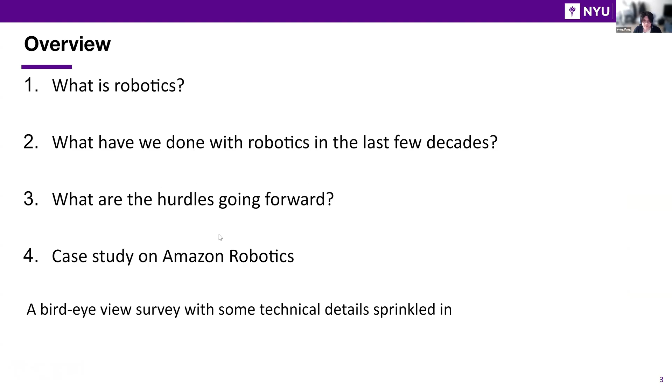The overview of today's talk is going to be these four points: basically what is robotics and what have we done with robotics in the last few decades, what are some of the hurdles going forward, and a simple case study on Amazon Robotics.

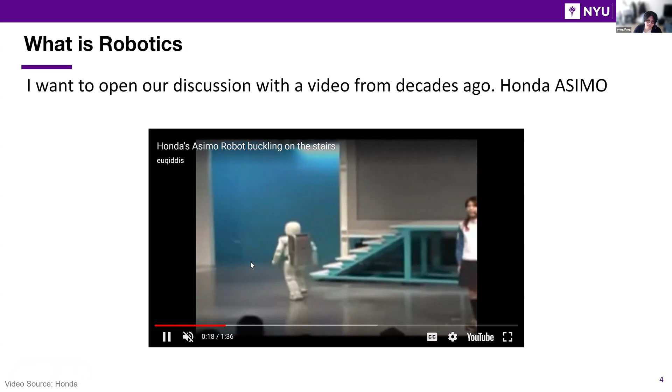I want to open our discussion with a video from decades ago. This is Honda's humanoid robot called Asimo. As we can see in this video, there is a robot shorter like a little human, walking around and carrying a backpack, walking very slowly, trying to do a presentation where the idea is to let the robot walk on the stairs. And while the title already kind of spoiled it, later on we'll find that this robot failed to do so - it basically falls down the stairs.

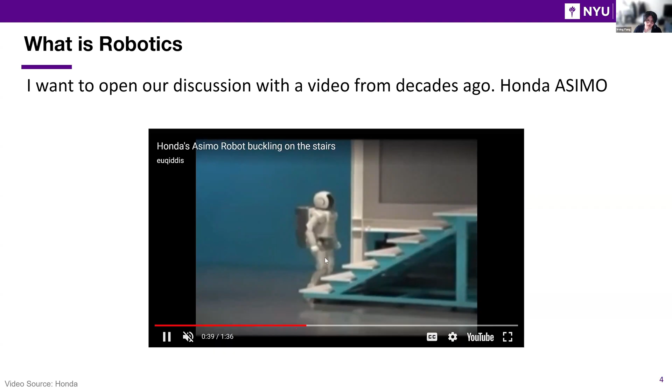For anyone very interested in robots, maybe as a kid, the Honda Asimo is a very famous, world-famous robot that made it into the public eye.

Traditionally, when we talk about robots, we also talk about these types of machine humans that have a little sci-fi element in them. But I'm going to show you that there are actually a lot more types of robots, or things people call robots.

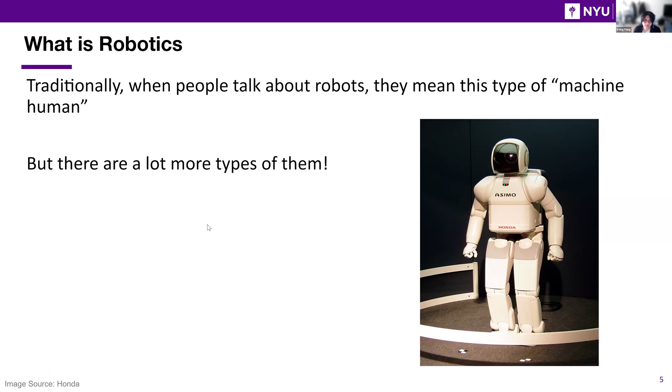In this video, I can briefly show you a VW robot factory in Hungary assembling an Audi car. As we can see, this robot can carry this very heavy metal component with relative ease and can piece things together with very high precision.

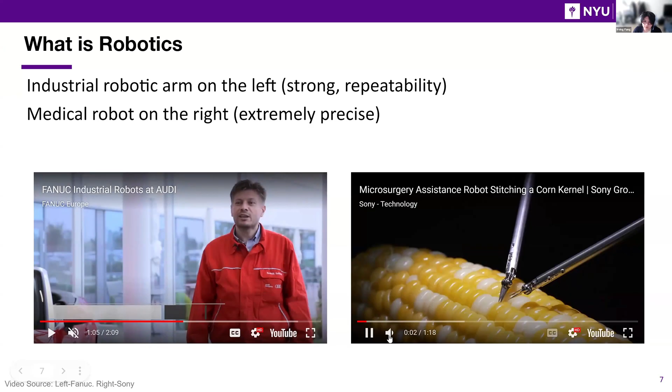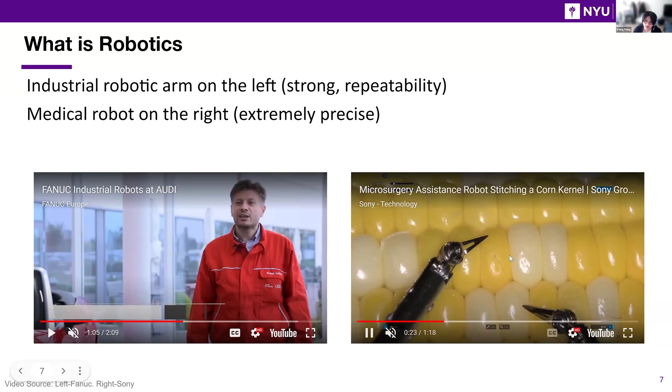This is doing some tracing of a certain line with very high precision. On the right, we have this medical robot from Sony - yes, the company that makes the PlayStation. They're showcasing a robot doing a mock surgery on a corn kernel, trying to mimic stitching a wound on the human body. As we can see, it performs a very precise manipulation on this corn.

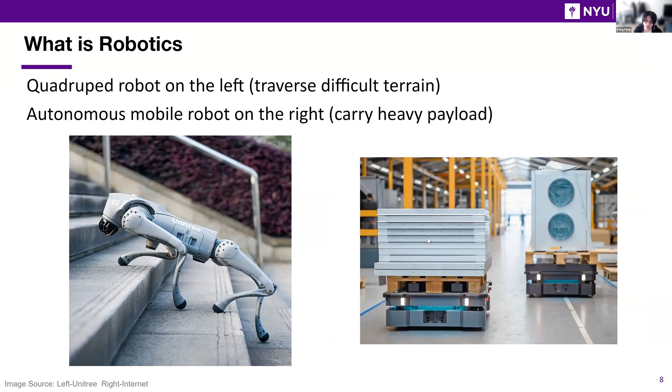And these are just two types of robot. In the wild, we also have these robot dogs that have 4 legs — that's where they get their name from. And we have these autonomous mobile robots that we often see in factories or warehouses, where they can carry very heavy payload and walk around.

So one question arises: isn't the quadruped on the left also a sort of mobile robot? Why isn't it called an autonomous mobile robot? As we can see, these names and classifications are mostly marketing jargon and human construction. They are not the essence of the robot itself.

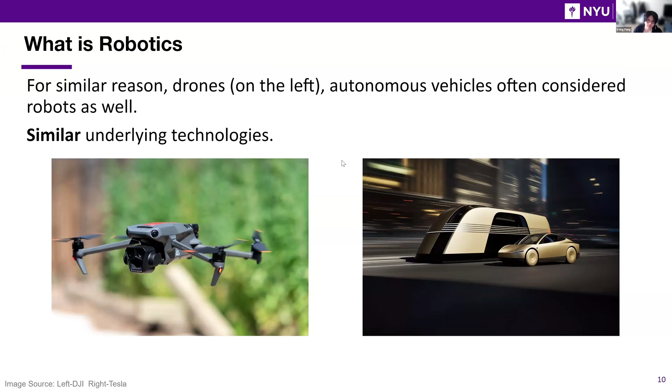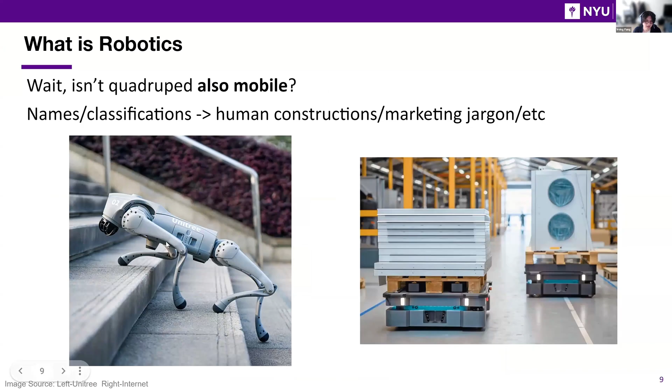But without a very ironclad, strict definition of what a robot is, we usually study things that are humanoid — shaped like a human — robot arms, quadrupeds, mobile robots with wheels, drones, and autonomous vehicles. So if you present research studying cashierless grocery stores, we usually wouldn't consider that a robotics study, even though some of the underlying technology is exactly the same.

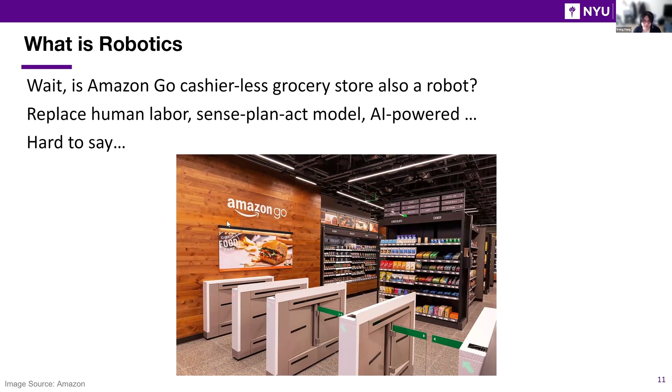So after talking about what is a robot, what makes something robotics, I want to talk about some recent progress in the academic community. Some of these aren't necessarily in order of significance, although I do pick things I think are some of the biggest breakthroughs in the community.

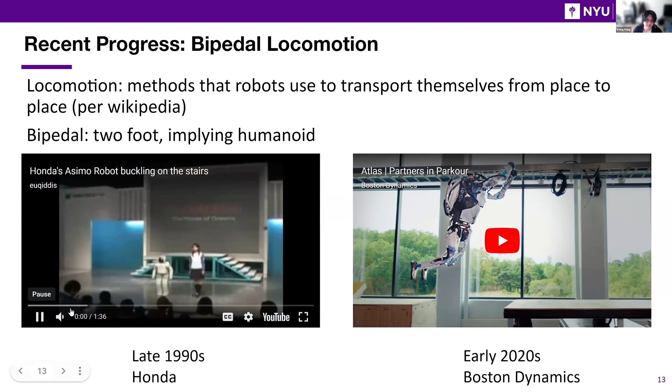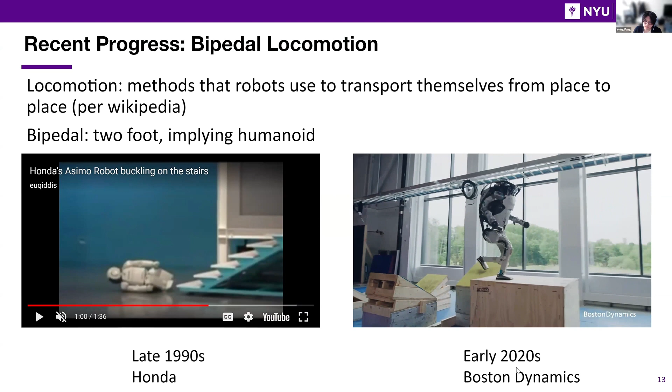This is the same video of the Honda Asimo that I showed, debuted in 1996 — almost 3 decades ago. This robot walks kind of awkwardly and later failed a very simple task of climbing stairs. But on the right, we have Atlas, a Boston Dynamics robot that can do very impressive tasks that even a healthy human sometimes struggles to do.

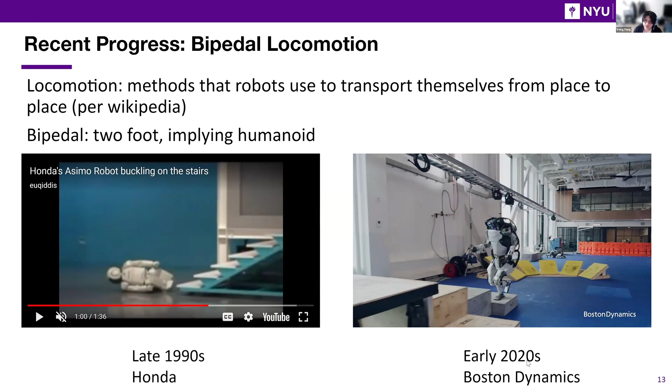So a natural question to pose is: what enabled this significant breakthrough in just a span of 3 decades?

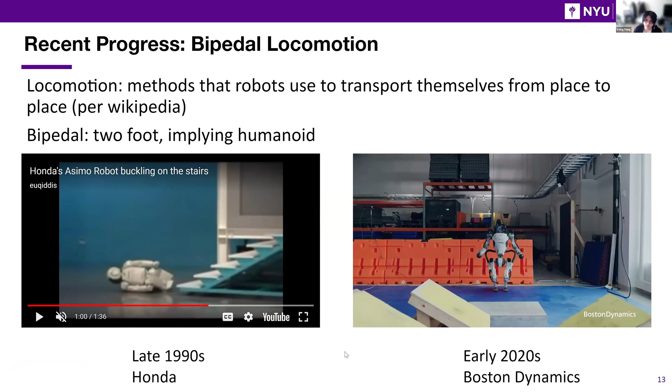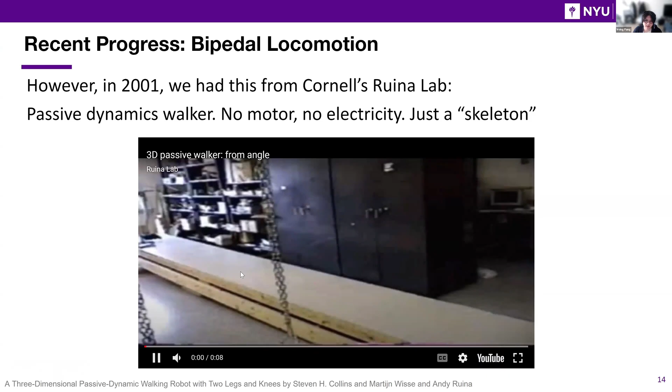To answer this question, let's first take a little time travel back to 2001, that's 2 decades ago. There is a very interesting research coming out of Cornell's Ruina lab, called the passive dynamic walker. Let's look at what it's actually doing. This is a robot walking down a ramp without a motor, without electricity — just a skeleton, metal shafts pieced together — and it can walk down the ramp with a very natural gait and human-like behavior.

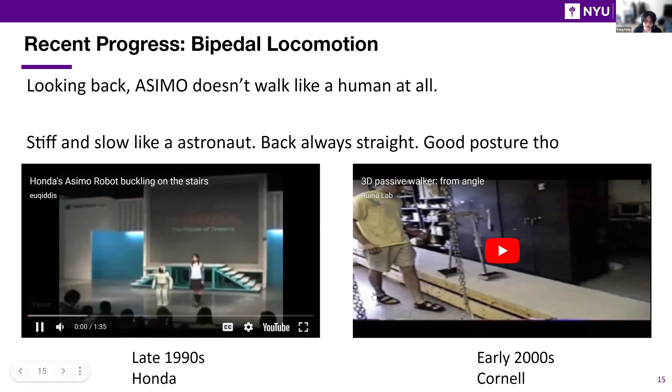So looking back now, comparing these two things, right?

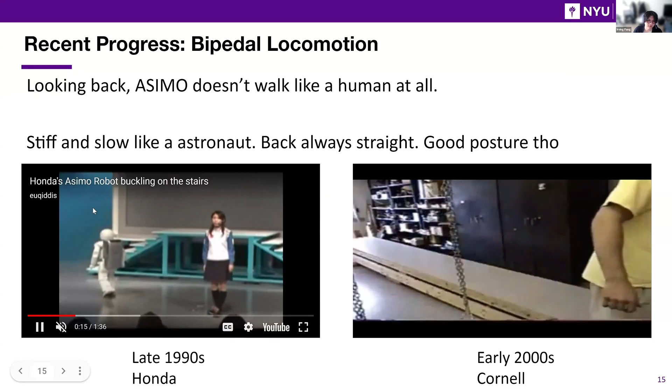Looking at these two, one of the major differences is that the Asimo robot walks in a very stiff and slow manner, like an astronaut. The back of the robot is always very straight and doesn't really look human at all—doesn't look like a human on Earth, I'd say. Whereas this robot uses a lot of motors, electricity and energy, with a battery pack on the back.

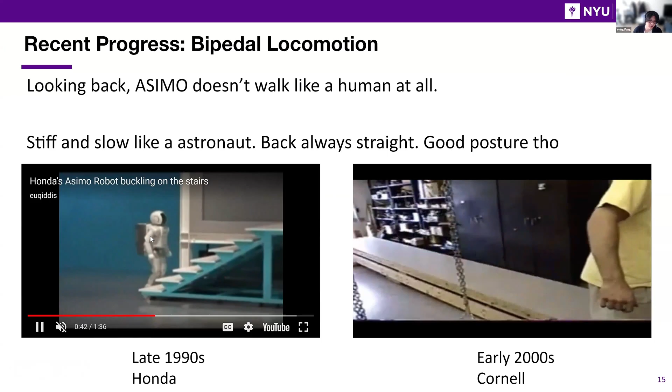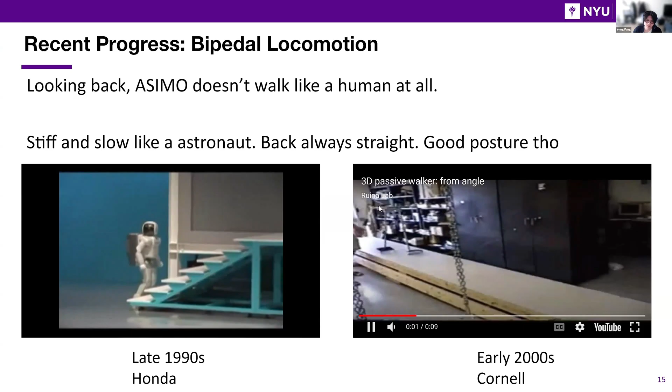So why is it that such a sophisticatedly engineered machine performs so much worse than this very simple shaft pieced together, with no electricity, no motors? The answer, without getting too technical, is...

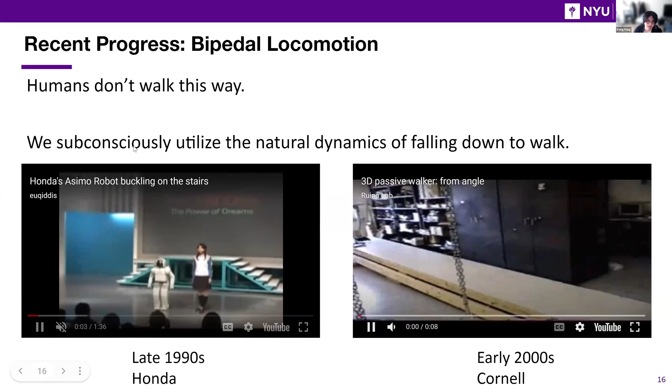We subconsciously utilize the natural dynamics of falling down to be able to do the walking behavior. The Asimo robots use a very conservative control strategy that lets the motor cancel out every possibility of falling down. So the robot walks very stiffly, because every motor is exerting very strong power against the natural dynamics of the system. The robot won't fall down, yes, but it also walks very conservatively.

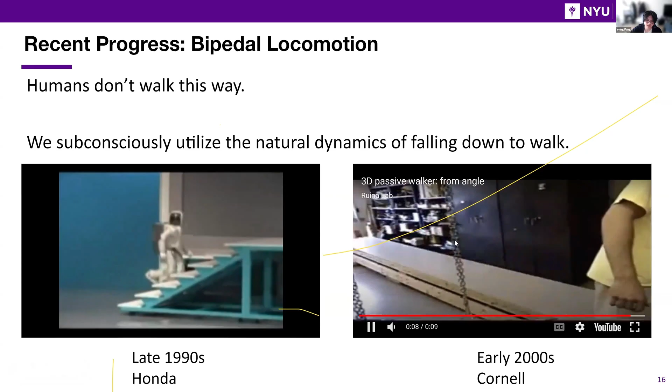Whereas on the right, the robot is walking by utilizing this falling down dynamics. There's a ramp—if you put a ball on this ramp, the ball will just roll down, rolling down.

By the way, what is this? What is this yellow line on the screen? And there's this yellow line on... sorry.

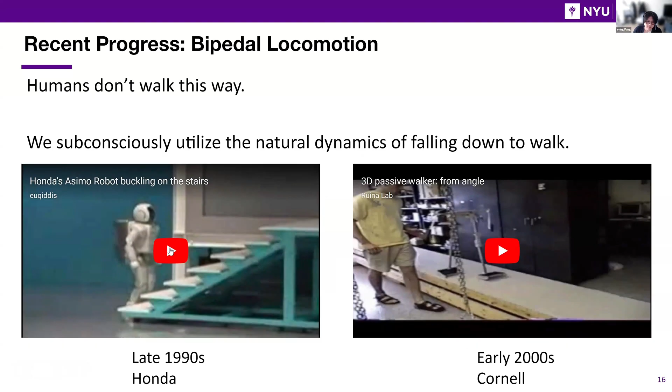This is utilizing this dynamics instead of actively trying to cancel out the falling down dynamics. And this is a very key insight that gives rise to the better bipedal locomotion we see today.

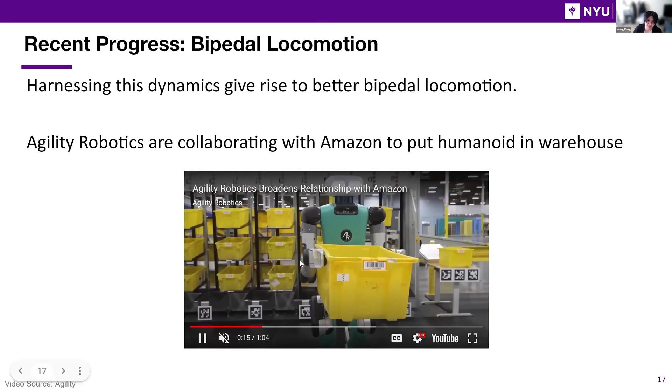This is another humanoid robotics company called Agility. They're collaborating with Amazon and can perform manipulation tasks like moving empty bins around. I brought up this company because it's founded by Professor Jonathan Hurst, a robotist with extensive experience using this kind of bipedal dynamics. Precisely because we now have a better understanding of this dynamics, of how to utilize this falling down tendency, we are creating these better humanoid robots.

In a sense, this is similar to how different birds and airplanes fly. A bird can use very little energy and stop on a tree with ease, but our human-made aircraft needs an immense amount of energy compared to its body weight to fly, and won't be able to do any tricky maneuver like stopping midair to land on a tree. But that's very easy for birds and any living creature to do, precisely because they subconsciously learn how to manipulate the natural dynamics of their body weight.

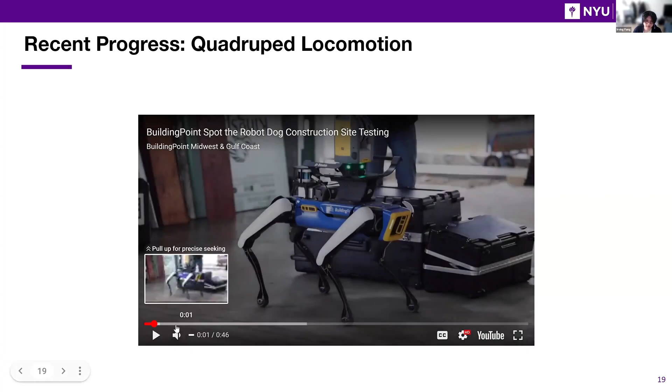Similarly, this gives rise to better quadruped locomotion as well. I'll omit some technical details here, but quadruped is obviously a lot easier than bipedal, two-foot locomotion. So this is trying to showcase some of the capability of evolving quadruped robots.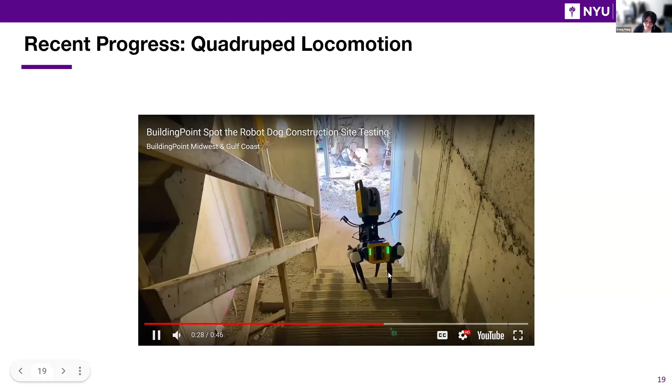One thing I want to highlight is this behavior of walking upstairs. This is one of the major reasons we want legged robots instead of wheels or other locomotion techniques. Legs do provide better traversability when it comes to difficult terrain, and quadrupeds are slightly easier to handle than bipedal.

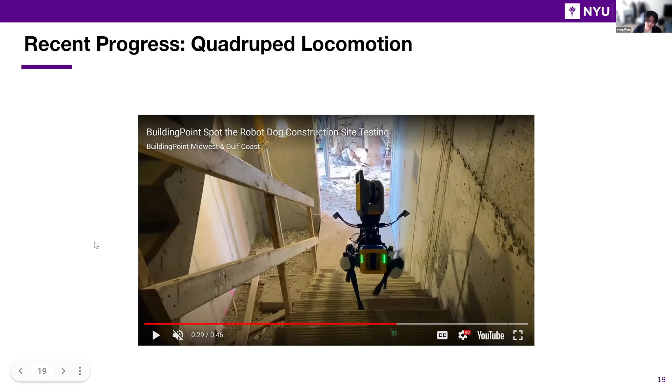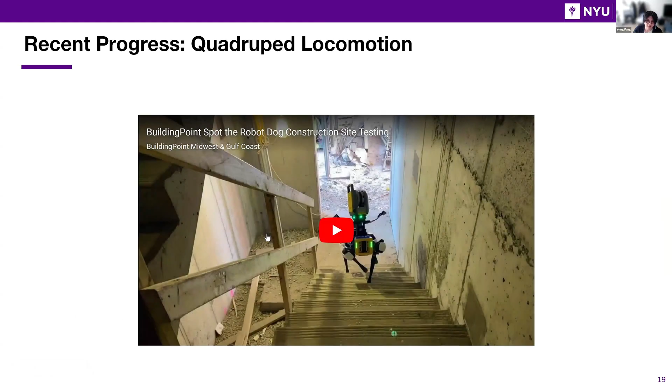But under the hood, the improvement we're seeing recently is also due to the reason I mentioned—that we now have a better understanding of this dynamic system, of this walking dynamics, which allowed us to create these improved robot systems. So another very recent progress we're seeing is that traditionally most robots work in a cage, or no-man condition.

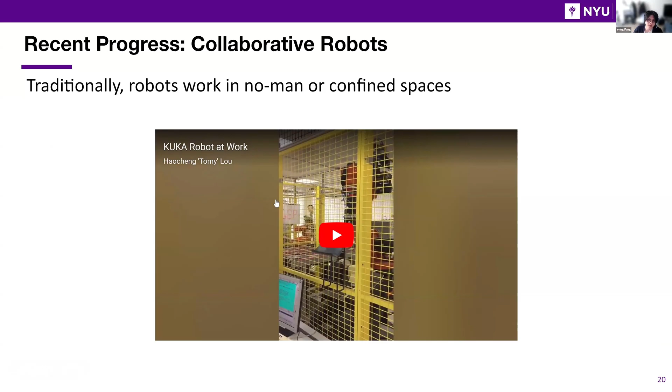For example, in this case, there's a yellow cage around this KUKA robot doing whatever task—I'm not exactly sure, seems like a demo.

The reason is because these robots have very limited perception capability around the environment. They do not know what's going on around them; they just do whatever they're programmed to do. When a collision happens, when a robot collides with a human, the robot will have very limited understanding of what it collided with, and it will basically keep going and crush the human's bones. A human is very fragile in the face of a robot, a working industrial robot.

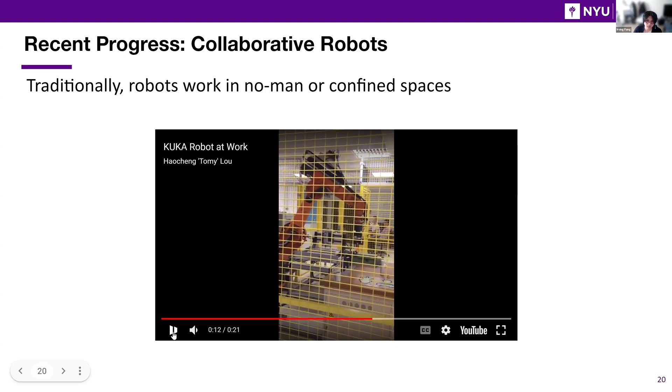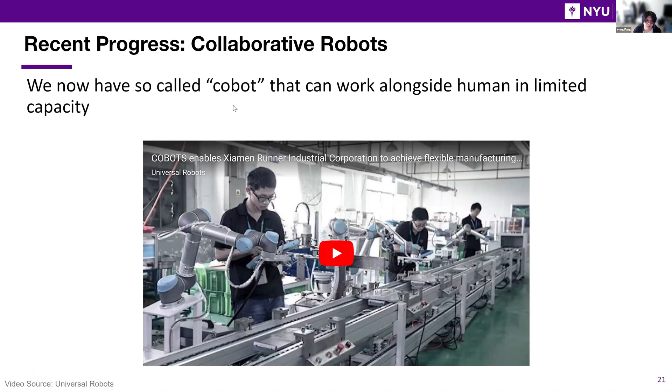But this is changing now because we have this so-called cobot, short for collaborative robots, and they can work alongside humans in limited capacity.

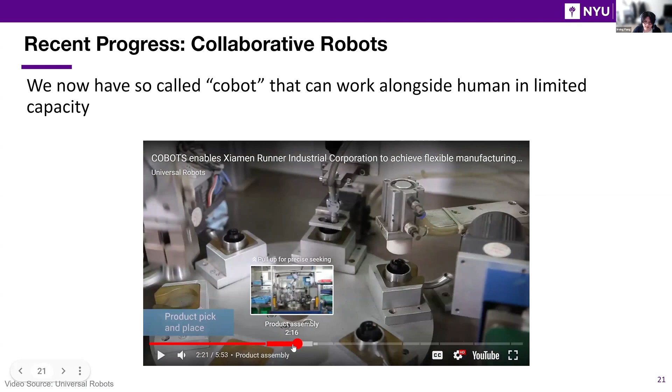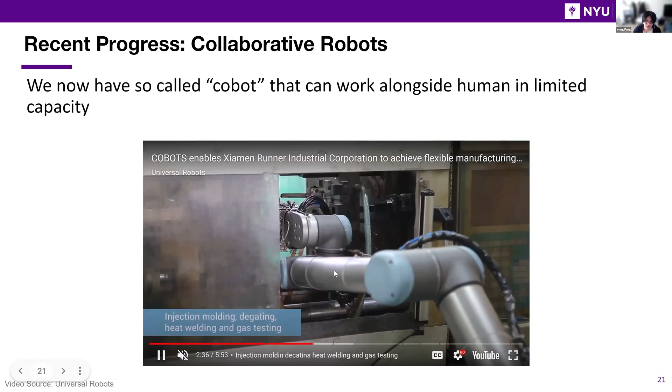This is a factory in China, Xiamen, where they're making, I believe, car components. As you can see, we can see humans walking with this robot in very close proximity. They are feeding parts to this little machine, and the robot can pick the stuff immediately.

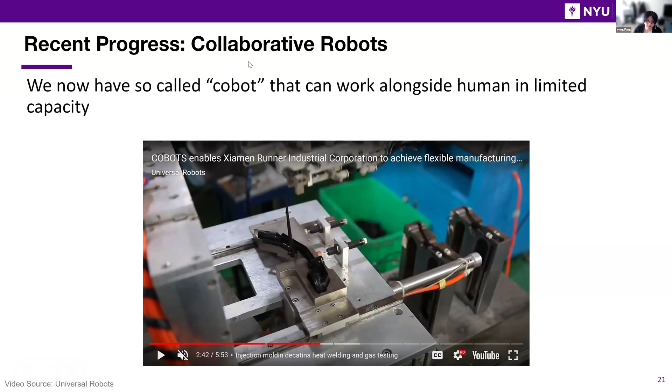Overall there's very little safety concern with this. Well, there are different regulation standards across the world, so in some places this kind of factory layout is not ideal, maybe will be illegal. But this also showcases that today there are industrial robots much safer to work with humans, unlike the one I showed previously, where it has to be put in a cage.

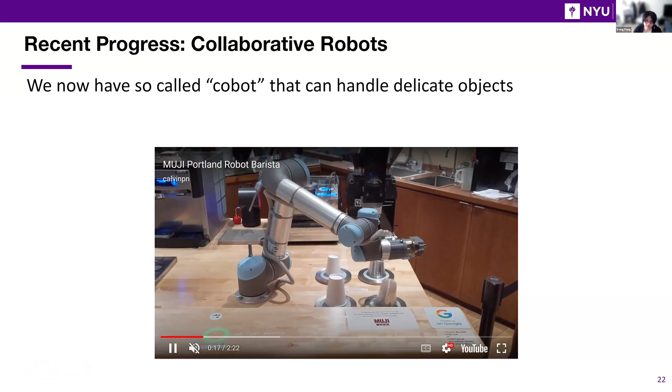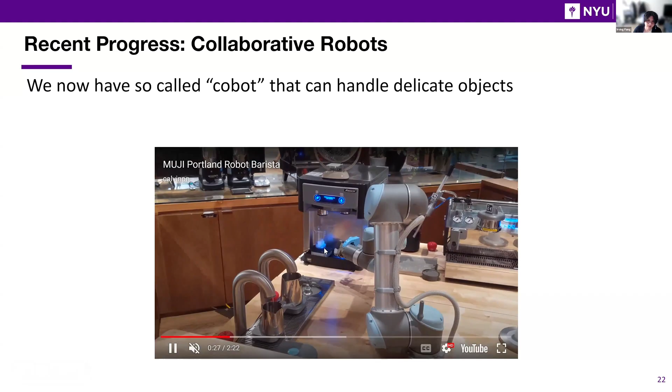This is a video I didn't take, but this is actually a robot in Muji in Portland, doing a bit of barista work, making coffee, and handling relatively fragile items such as a plastic cup. A lot of the stuff you need to eat needs to be safe and usually very soft. Now these cobots can also handle these very delicate objects.

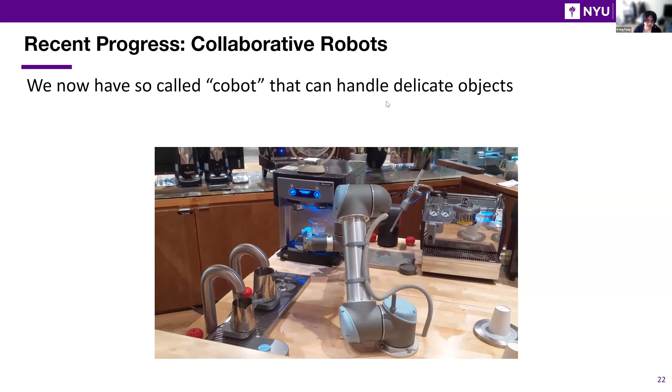So what enabled this transition? Why are we having these robots now, and why are industrial robots usually dangerous and only kept in confined environments? There are a lot of reasons for this.

One is sensing - the robot can now see better around the world. I'll talk about this later in more detail. But another thing is that now we have better control algorithms, or another way to put it, there are certain control algorithms that can make robots safe when there's contact. But back in the day, we didn't get much adoption, and we didn't really apply them to robots - we applied them in other engineering domains.

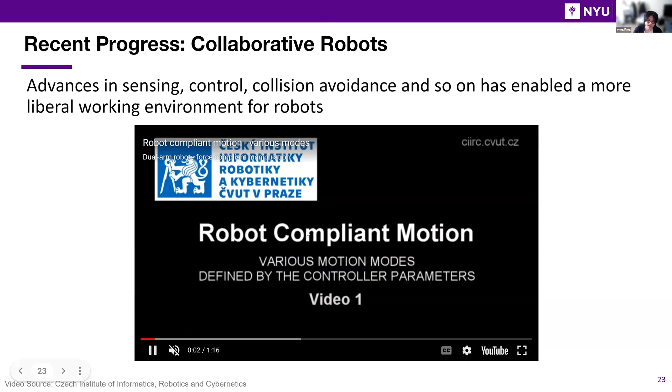This is an example of exercising compliant motion, meaning the human can sort of play with this robot and the robot will not be very stiff. It will act like a spring - if you push it hard enough, the spring will compress, and if you push with relatively little force, the robot will not move or react as hard.

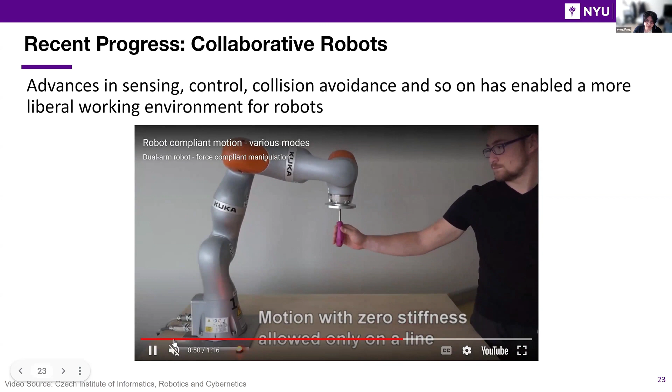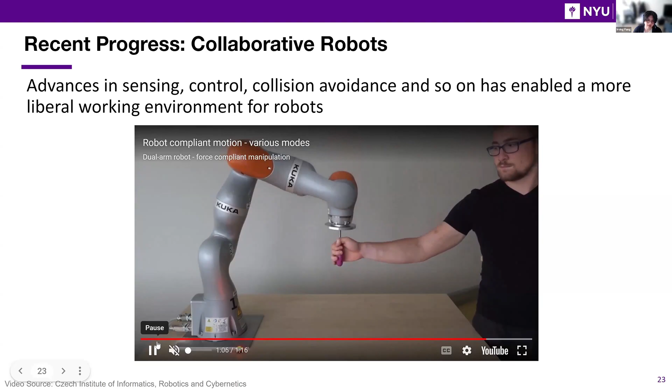This is enabled by additional sensors in the robot and a clever algorithm that enables you to do so. This makes the robot relatively safe. As you can imagine, if there is a collision between the robot and the worker, when the collision is hard, the robot will become soft, will act soft - the material won't change, but it will act more softly, resulting in a less dangerous collision.

Talking about sensing and perception brings us to another major advancement we've seen in the last few years. Like many autonomous systems, the robot generally follows a sense, plan, and act model.

This basically means the robot first senses, maybe by seeing with a camera, maybe by lidar or radar - whatever can sense the surrounding environment. Then the robot thinks for a little bit, a computer does a bit of thinking, and then lays out an action plan and does the stuff. Humans roughly follow this pipeline too - whenever we want to do something, we first look around, think about it a little, and then do our action.

However, humans can also think about things while we are actually doing the thing. For example, when I grab a water bottle or my iPhone, I don't first locate it and close my eyes to grab it, then open my eyes again when I finish. Whenever I grab it, my hand can feel this thing - my hand can feel that there's something in it and there's a certain shape to it. So I always have this sensation, always have this feeling.

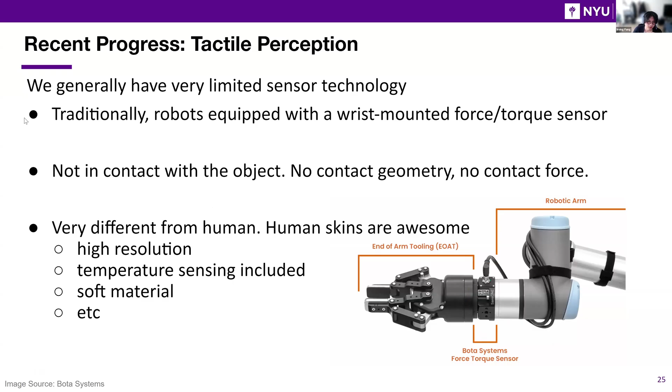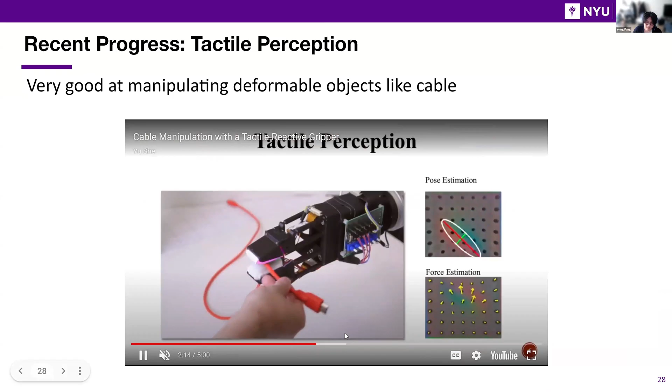Something tangential to this, though not entirely the same, is that I previously mentioned medical robots that can perform delicate operations human surgeons found difficult. One big caveat is that just before this year, before 2024, all those medical robots had no force feedback. This means that if the surgeon is manipulating these little knobs, little controllers, just like a PlayStation controller, the underlying principle is exactly the same. When you're manipulating this, maybe doing surgery on a human, and say the little knife hits some organ or bone, the human hand will feel nothing. You can only see on your monitor that the robot is colliding with something else, but the human doesn't actually feel it. There's no force feedback to this little controller, and that's been a problem for 20-something years.

The company Intuitive Surgical, maker of the Da Vinci robots, has been around more than 20 years, but their robot never had the capability of providing a little bit of haptic, a little bit of force feedback. That is changing this year. In 2024, they started to sell their Da Vinci 5 system, which finally comes with force feedback. This isn't exactly the same technology that enables what we saw when manipulating mushrooms, but they're very related.

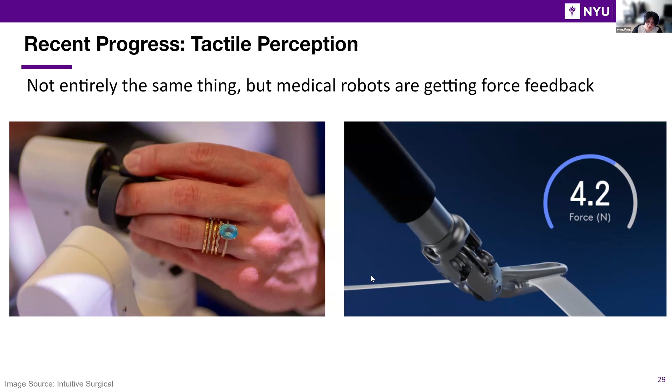So these four things that I briefly mentioned are some of the biggest progress we've seen, enabling robots to move around better through bipedal locomotion, enabling them to work alongside humans instead of replacing them, and enabling them to manipulate things we thought robots couldn't handle, like cables or delicate food. But at the same time, there are also a lot of hurdles going forward in the robotics domain.

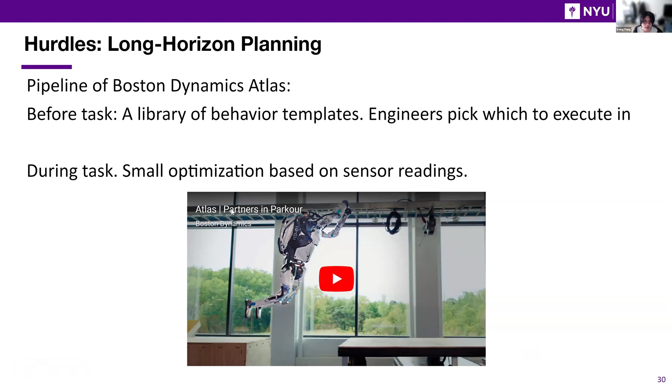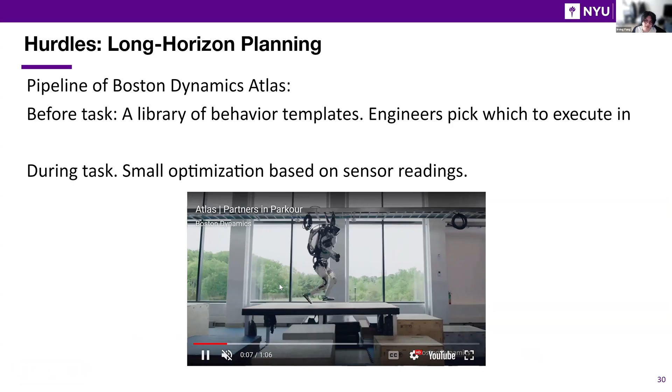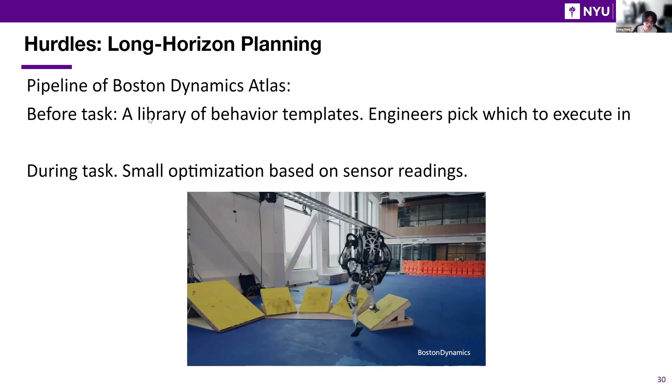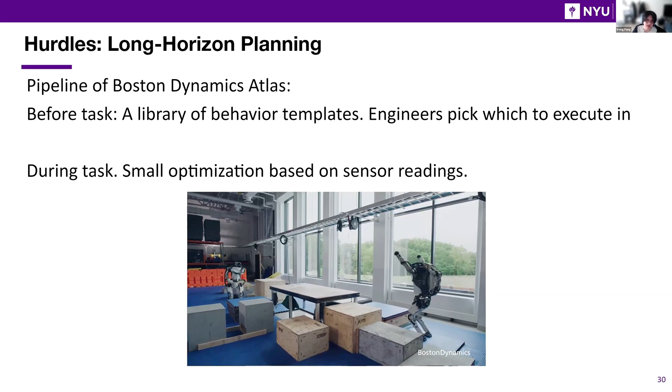One thing is this long horizon planning problem. Coming back to this very impressive Atlas doing some tricks - how do we actually achieve this pipeline? Boston Dynamics never explicitly published their technical stack, but most people in the community agree they follow a pipeline like this: first they have a library of whatever behaviors look very cool. When they want to do something like this, some engineers come together and chain them together.

When chained together, it's like a dance move that you memorize - when to execute what. While the robot is actually doing these things, there are sensors on the robot doing small optimizations based on sensor readings. But everything else, like how the sequence is designed, is done by engineers. So there's some human in the loop, and this actually poses a significant challenge.

For example, if we want a robot that can make coffee for us, at some point inevitably the robot will make mistakes, maybe spill the coffee or whatnot. So when that happens, what is the robot going to do? The robot needs the capability to reason about these long horizon tasks - even if it's the same pipeline of chaining behavior templates, how do we chain them together? This capability is very important.

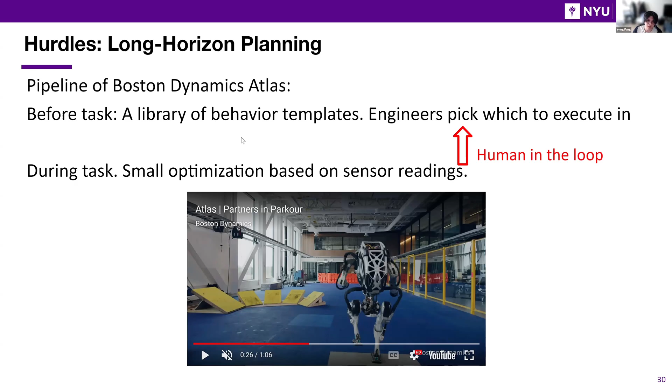This might turn out to be a very useful answer, maybe not the only one, to a long-standing problem that has troubled robotics in the entire world. There are a lot of variants, some people call it large vision language model, some call it large vision language action model. Things get more and more complicated in name, but the underlying idea is the same: we use GPT-like models to do the kind of thinking we believe only humans possess.

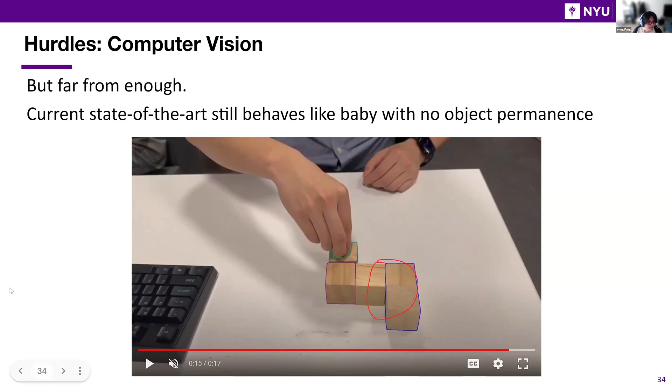There are some other examples similar to this. In this video there's even more stuff, but the idea is the same, different color for different cube. Here we already see that this cube that had a yellow contour, the model loses track of it. Another thing: at this moment, this one is a purple block. When it's moving, there's a brief moment where the model thinks this is actually a block with a green contour. So we see all these temporal issues, meaning the model has all kinds of difficulty when it comes to this tracking problem. This turns out to be a huge issue in robotics when robots are walking around in the real world.

Another major issue comes back to the humanoid we talked about in the very beginning. Even though we're all excited about robots that look like humans, do we believe that human is the ultimate form factor of living creatures? That humans are the perfect form of any living being? That seems pretty unlikely. For example, whenever we want a room that's not too hot, instead of having a robot wave a fan for you, ideally we'd want an air conditioner that looks nothing like a human but performs much better at the job, much more efficiently at making the room less hot. So this is another problem.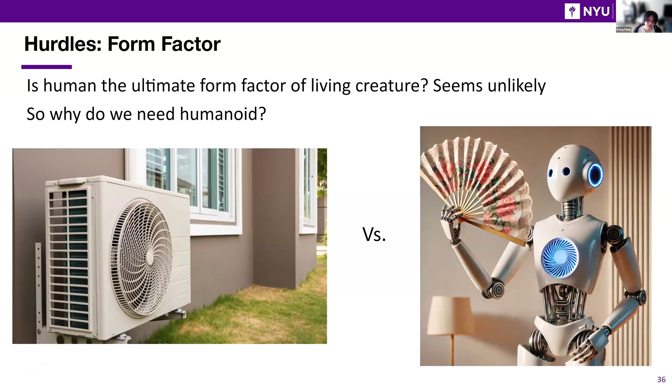Do we even need humanoid robots? When we spend so much money and R&D effort on it, do we need those humanoid features like an arm or leg? Are they even necessary? Do we even need robots in the first place?

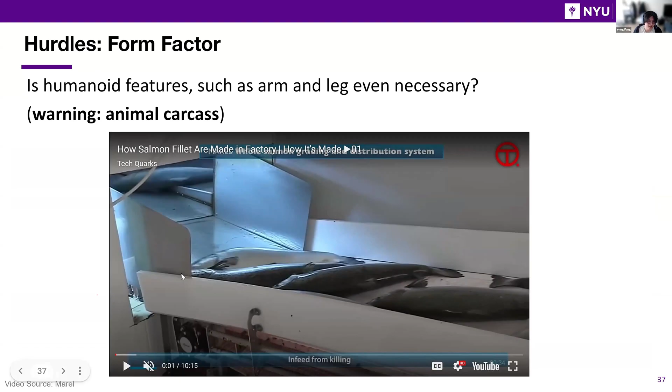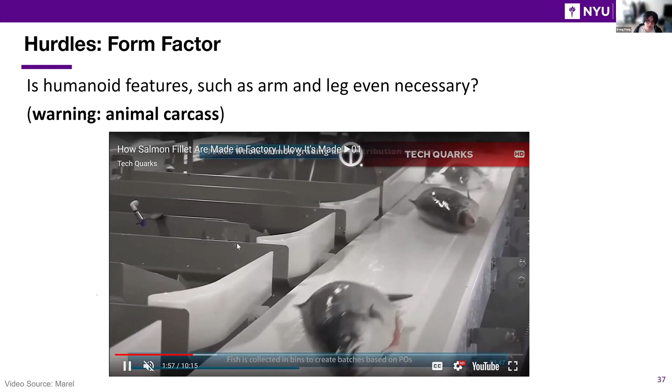This is a factory that handles salmon, and there are some animal dead bodies, so if you're not comfortable with these, please look away for a bit. When we see how this salmon's body gets handled, there's no human arms involved except for those workers. There are automatic mechanisms, machine designs that can efficiently put them away. So do we even need these human features like arms or legs to help us handle all these things?

I don't actually have an answer for this. There are a lot of debates within the community, whether it's industry or academia, that we're still learning what is the ultimate form factor for robots.

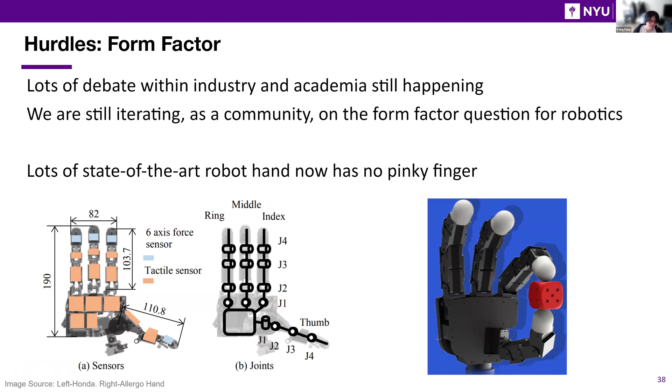One interesting thing I can introduce is that the state of art robot hand mostly has no pinky finger. They only have four fingers, and they're able to handle most of the robotics manipulation jobs. This shows that maybe humanoid features are not the most efficient, not the best thing to do, and there's a lot of room for improvement. We'll come back to this later.

But another major hurdle with robotics is that in general, automation is one of the most delicate problems in our society. For example, just a few weeks ago, there was a huge strike at a U.S. port that handles offloading containers from ships that the U.S. imports from other countries. You might not know this, but the U.S. has some of the least automated ports globally, and by some efficiency ranking that think tanks and researchers did, the US actually has the least efficient port in the entire world.

Not among developed countries, but on the entire planet Earth, because people have this strong opposition to automation. And I do think they have very good reason to think this way.

Another Nobel winner this year, Daron Acemoglu, examined data in his paper that shows automation is increasingly displacing jobs faster than creating new ones. Although the implementation effects of automation aren't exactly clear, for example, some economists believe automation enables companies to grow beyond their potential and in the long term create more jobs. So as for now, we don't really know.

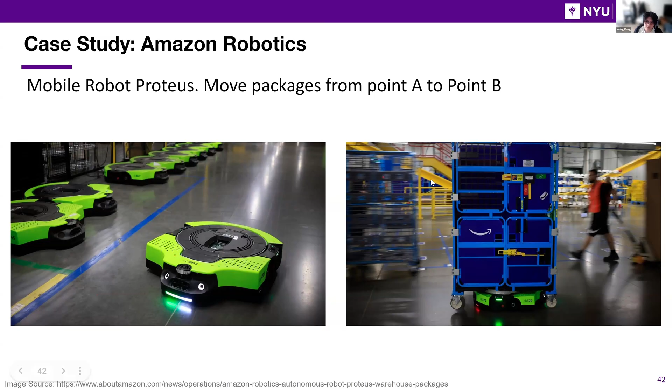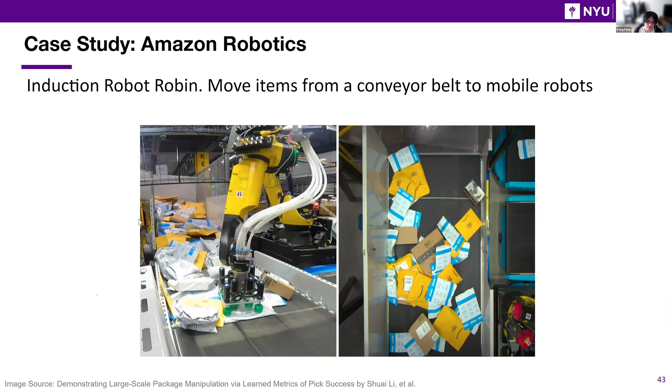So what kind of robots does Amazon actually utilize? There are a lot of different names and models, but basically they come down to two form factors. One is a mobile robot that basically just moves things from point A to point B. There are also some induction robots, meaning moving stuff from a conveyor belt to the mobile robot, moving stuff around. This is called Robin.

Robin is a very good example of why robotics is hard, even in a warehouse where we have a very confined environment. First of all, there's no uniform shape, everything looks kind of different, texture is different, and color is different. Sometimes when Amazon is doing some promotion, a lot of these bags will be printed with advertisements, so they look very different, and they're all clustered together. So only recent progress in AI and computer vision can enable a system like Robin to do this picking.

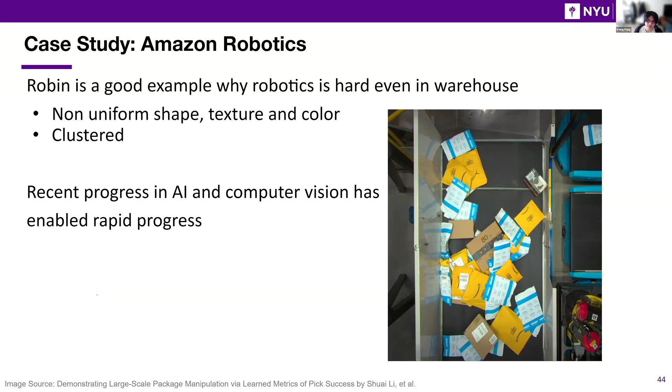This seems easy, but for a robot it is very difficult, because every time you need to execute a different trajectory, your arm needs to move differently, and sometimes you need to move other stuff a little bit to make space for the thing you're manipulating right now. You need some spatial awareness of where to put this, and how to move other stuff to make way for it.

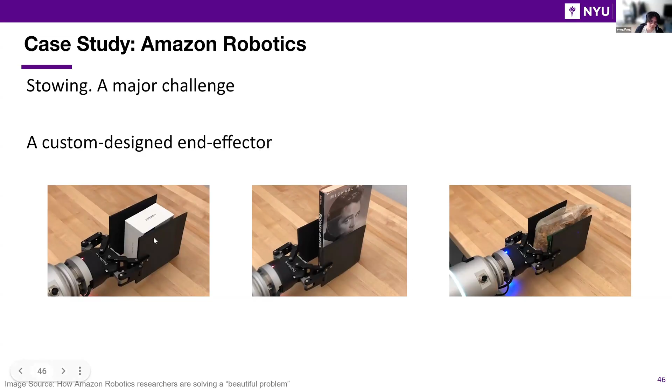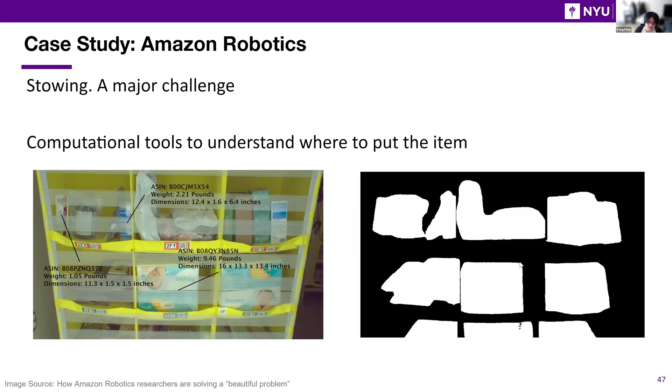And as you can see, this looks nothing like a human feature. Another thing is computation - how do you think about the space needed for putting those items inside the stow? They use computational tools to understand where to put items, and where to make more space for the item you're manipulating.

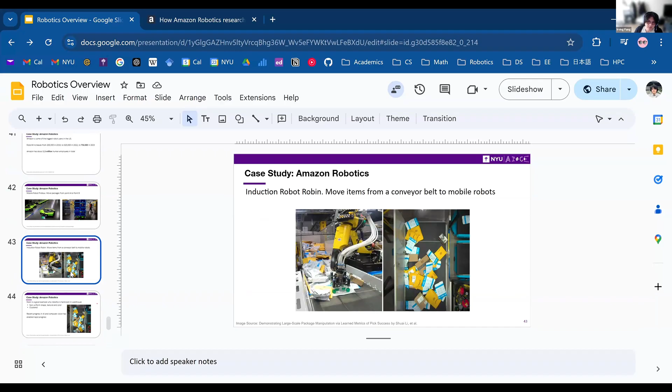The result I want to show is a very nifty thing they did towards the end of this: a robot that can do a bit of stowing, something like this - they mimic what humans did by pushing things, so the robot can now do this pushing and dropping. This very simple thing took Amazon a few years, and they're still testing this system.

They haven't entirely put these things into large scale deployment, despite having almost 1 million robots in their warehouses. Coming back to this societal issue, I encourage you to search for the stowing robots a little bit and see on Amazon Reddit, Amazon warehouse worker Reddit, how they react to this robot testing. Some workers are asked to help the engineering team test this robot, and they have different thoughts - some are in favor of it, some dislike it strongly. If you're interested, you can search this on Reddit and see how people react to this interesting small robot project Amazon is doing.

And with that, I think I conclude my talk today. We have a little bit over 10 minutes maybe, and if you have any questions, just feel free to ask. Thanks everybody for being here, I really appreciate your attention and time.

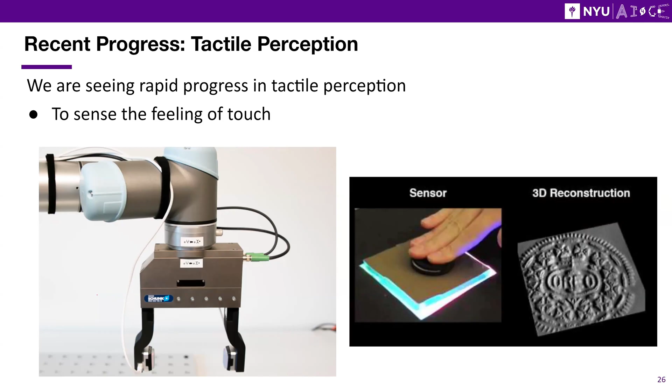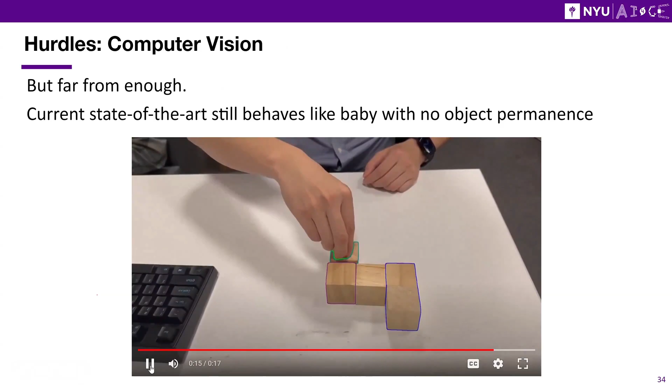I have a question regarding the project I believe you've done with human demonstration using VLM for the block building. I have a similar project where I try to use vision language models to analyze traffic incident videos, video clips. I followed a similar process where I decompose the task into several atomic tasks like object detection, tracking, or even pose estimation.

Then I send those intermediate results to a language model for reasoning. But one problem I noticed, not really a problem but a question in my mind, is that it feels more like an engineering project because it's really hard for me to inject academic contribution, since I'm basically just using a couple of off-the-shelf models and building them up to finish an objective. So I'm wondering, do you have any thoughts regarding this line of research? What's the merit we should bring up to advocate for such projects to a broad audience?

Yes, I see your point. I also had a similar feeling where I found doing research with large vision models or large language models incredibly easy, like you almost feel like you're doing nothing, like something an elementary school student could do without contributing much. I think that's on one hand inevitable, because if you're not involved with the engineering of the model itself, which you couldn't be since a lot of them are closed source, and even if they're open source, the computation required to engineer them is so big that in an academic setting it's difficult to do. So it's just like you feel you're not doing much, which I think is sort of inevitable.